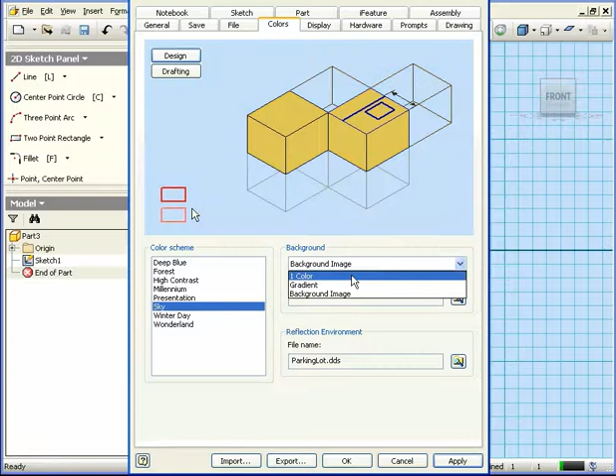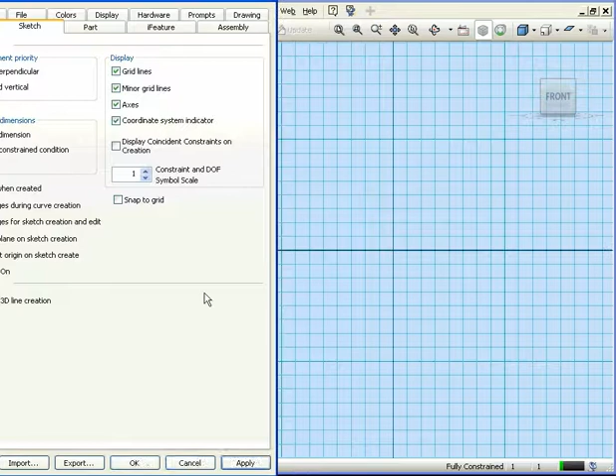Now let's go to the Sketch tab. Here I can opt to display grid lines, minor grid lines, and axes. Let's click Apply to see how the graphic area looks without grid lines, and let's restore the grid lines now. Apply. Let's restore the minor grid lines as well as the axes now. Apply. If Coordinate System Indicator is checked, the origin point will be displayed in your graphic area.

Let's uncheck this box and then Apply and Close. Now let's go to Tools again, but this time we'll select Document Settings. Click on the Units tab. In my case, I'll be using inches, imperial measurements for length. Under the Angle drop-down menu, let's choose Degree.

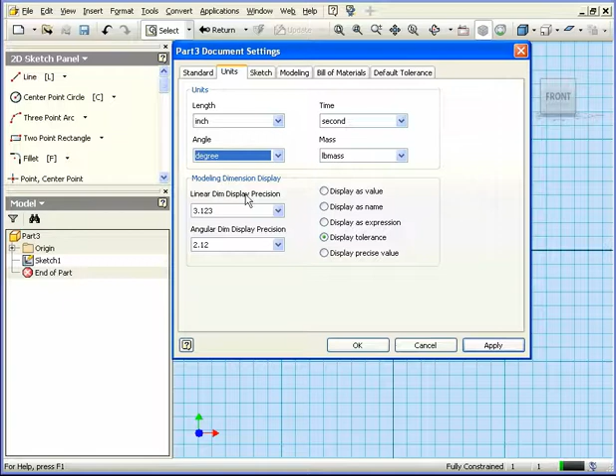OK. One more thing, let's go back to Tools, Application Options. Let's select the Part tab and look at the New Part Creation control area. You see that I've got Sketch on XY plane checked. Because I have this box checked, I ended up in sketch mode on the XY plane. A Sketch 1 was already pre-created for me when I created this new part.

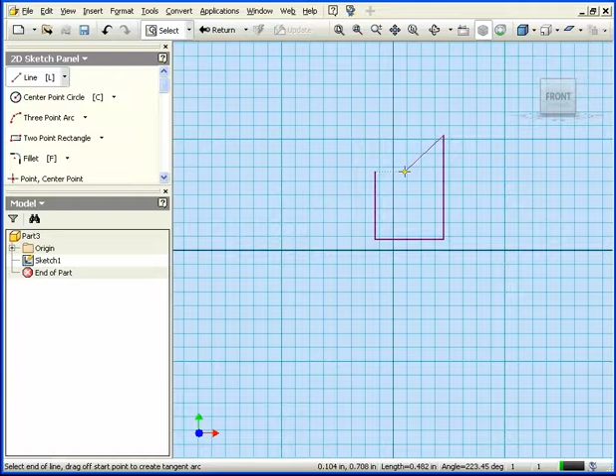Next in the panel bar, I'm going to select the Line tool. Let's create a simple shape here, something like this. After I've finished, I can press the Carriage Return or Enter button on my keyboard. I can also simply right-click and select Done.

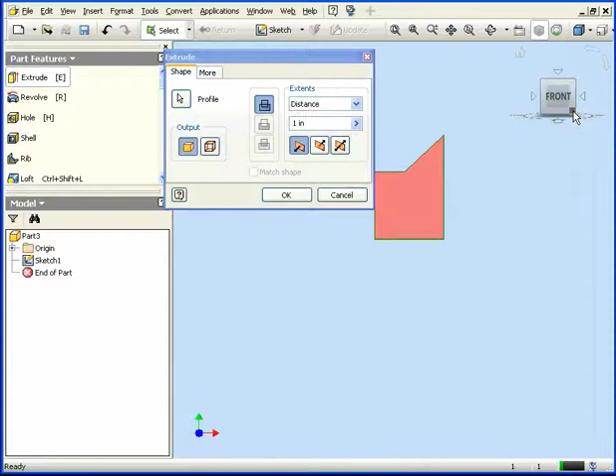Now I'm going to use the Extrude tool. I can click on the command here, or I can press E on my keyboard. Let's rotate our model a little using the View cube. Here we can specify the extrusion parameters, and when I'm ready, I click OK.

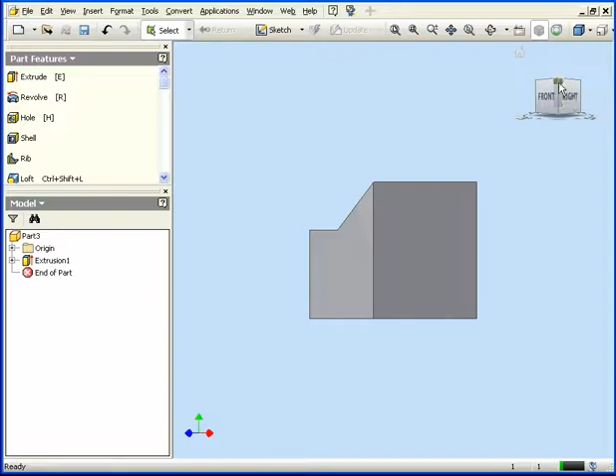To rotate our part, we can use the Orbit tool. Let's check out the Orbit tool. There's another way to do this. We can use what's called the View cube. We simply place the mouse in the region of the cube and then click. I'd like to remove the compass from the View cube right now. Right-click Options and then uncheck Show Compass and click OK. By clicking on Home, we'll go to an isometric view.

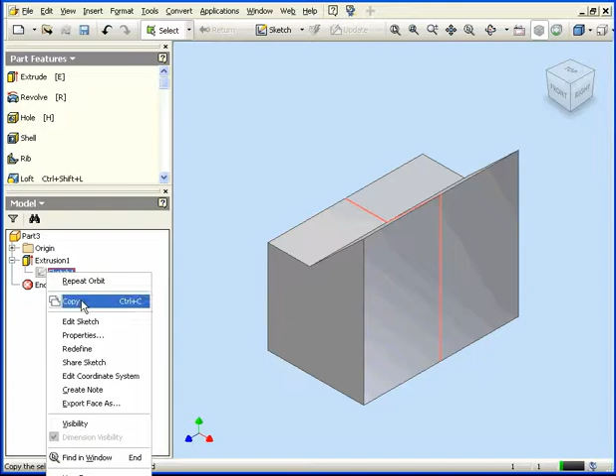To make modifications to the sketch, I can right-click on the sketch in the browser and select Edit Sketch. Let's make some minor changes. Now when I'm finished my changes, I click Return. Inventor accepts my update. Since we're working in a parametric environment, the shape of our solid has changed automatically.

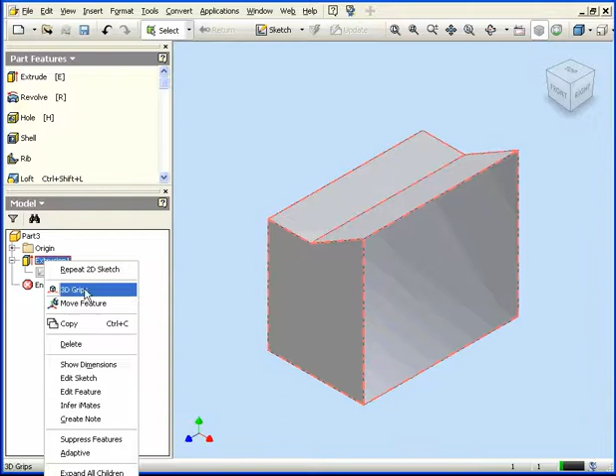To edit a feature, let's check Extrusion 1 in this case. I right-click on the feature in the browser and select Edit Feature. Let's make some minor modifications. We'll be learning more about this Edit dialog window later on. We click OK. Inventor accepts our update.

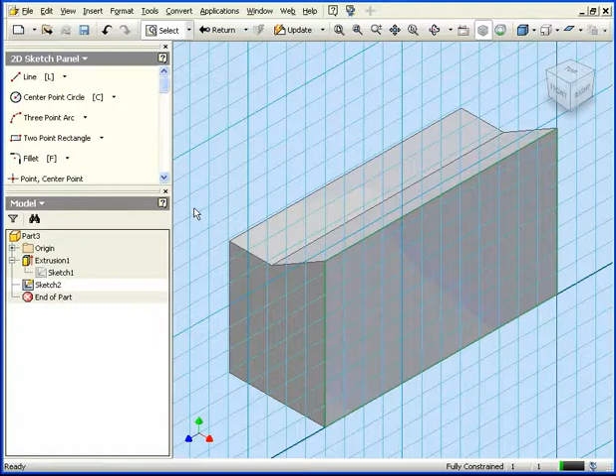Now to create a new sketch, let's say on this face, I can simply right-click and select New Sketch. As an alternative, I can click on the Sketch button in the toolbar. Let's select Undo and deselect everything in our graphic area. Let's create another sketch. We'll press the Sketch button again.

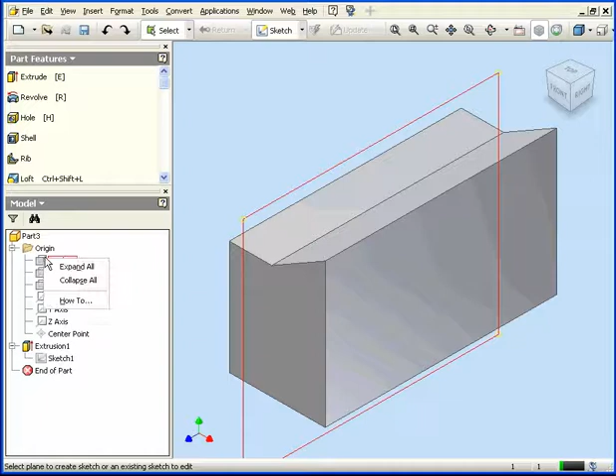Now I need to specify the sketch location. I can use faces, surfaces, or planes for my new sketch. Currently, I don't have my planes visible, but you can make your planes visible. Let me show you how to do that. Select the plane, right-click, and select Visible from the drop-down menu.

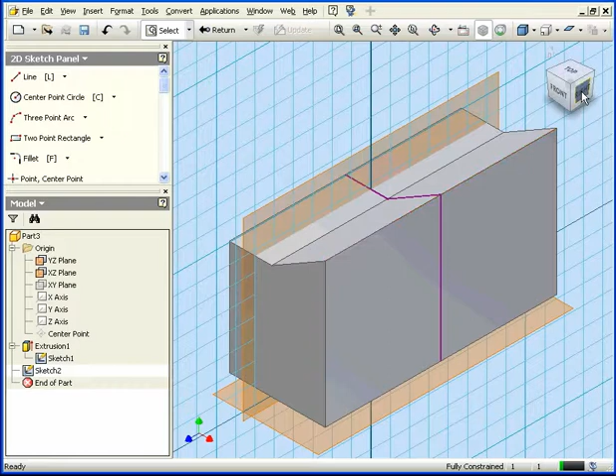Easy enough. The same principle applies for sketches as well. Right-click and select Visible, and we see our first sketch. Next, let's go to a normal view by clicking on the right side of the view cube. I'm going to activate the Circle tool and create a circle right about here on my graphic area.

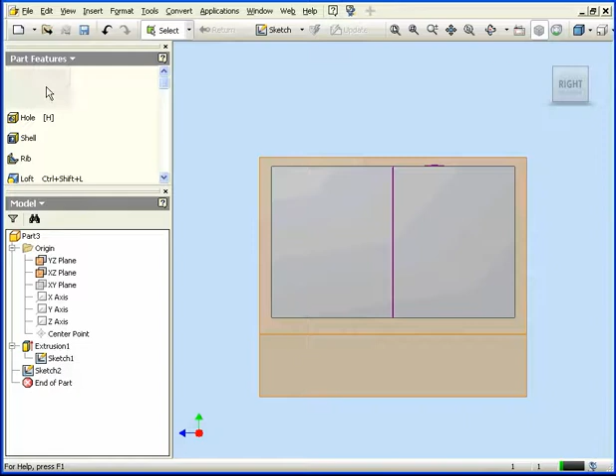Exit the sketch by clicking Return. Let's create another extrude now. We'll select this region right here. We make our necessary modifications and click OK.

At this point, we of course need to save our part. Select File from the main menu and click Save. Now we specify the location and click Save.

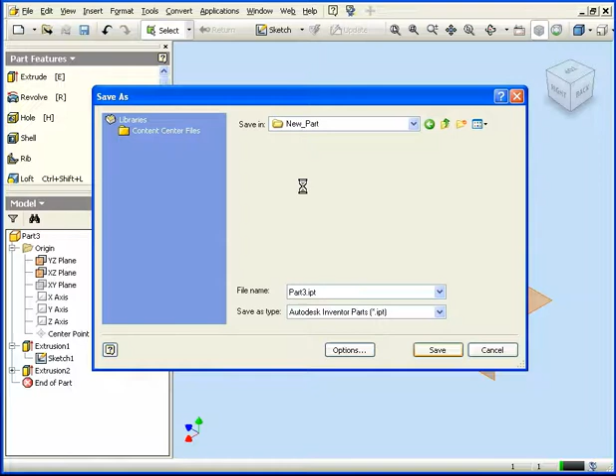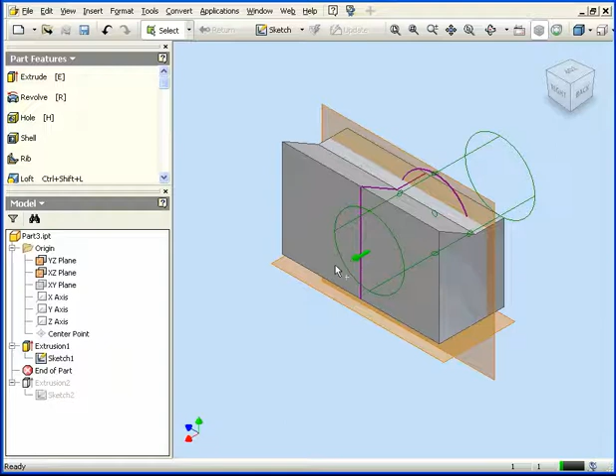There's a couple more things I wanted to show you in this tutorial: the 3D Grip tool and the Move tool. Right-click on Extrusion 2 and select 3D Grip. Let's grab and drag this handle. That's how we can change the length of the extrusion. When you're done, simply right-click and select Done.

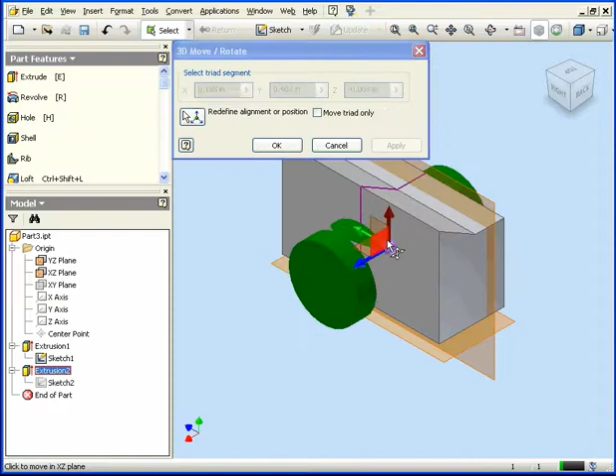Let's right-click now and select Move Feature. Now let's drag on one of the handles and we can reposition along the axis or the planes. We can also simply freely move it if we want to. And when I'm done, I click OK.

And this concludes our Introduction to Autodesk Inventor 2009.